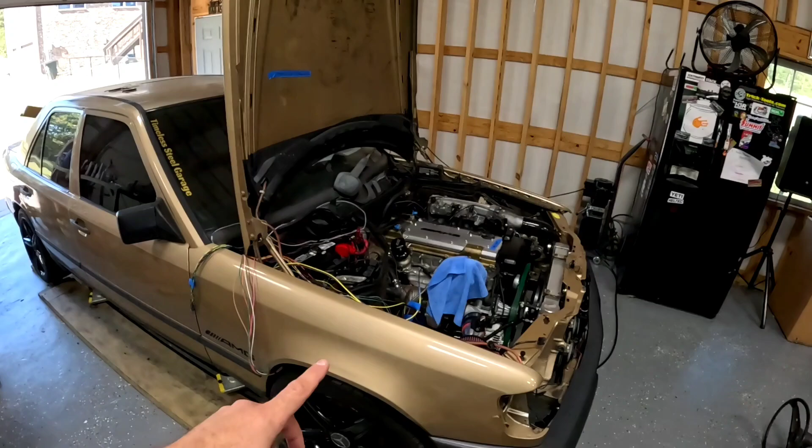Back on the Merc here, and I know you guys last week were like, why is he working on a Camaro? Well, I have to wait on parts too, so since you've been gone, I have done a few things. We got a start switch here now. Momentary start switch. Be starting the car with that.

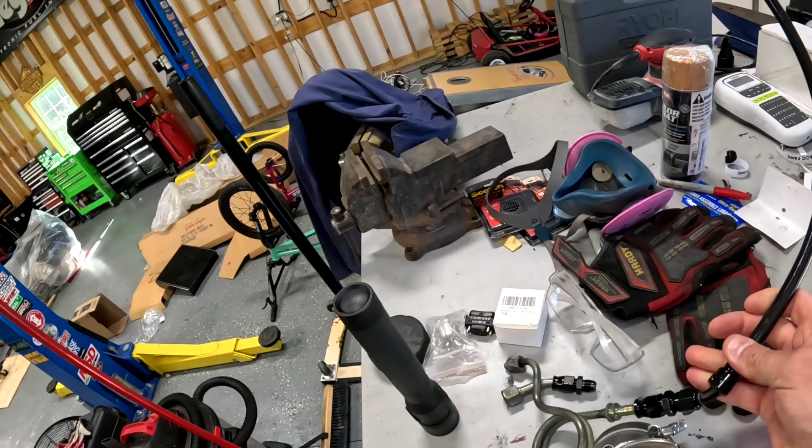I've got a couple of fittings here, and I actually have a line for the power steering. So today the power steering tank is supposed to get here, so we need to get these two lines hooked up, and hopefully when the power steering tank gets here I can mount it and we can measure for the other lines that we need, and the power steering system will be done.

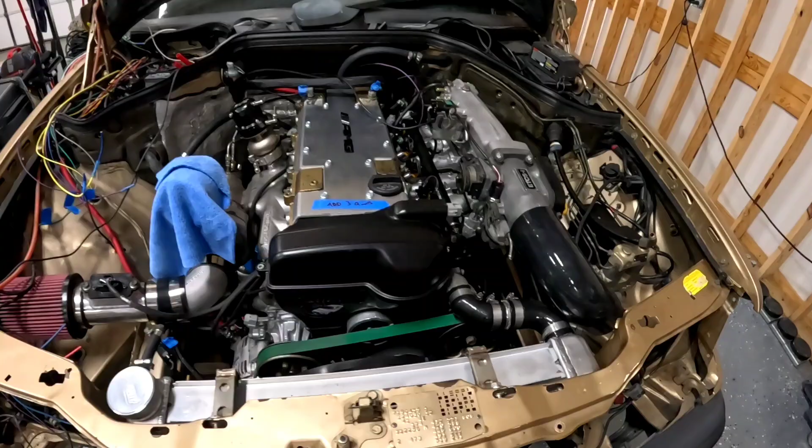The other thing that came in for power steering is I got this little adjustable fitting right here that can be turned and converts to AN10, so that part is done. The only other fitting I need for the pump itself is an M16 1.5 AN6.

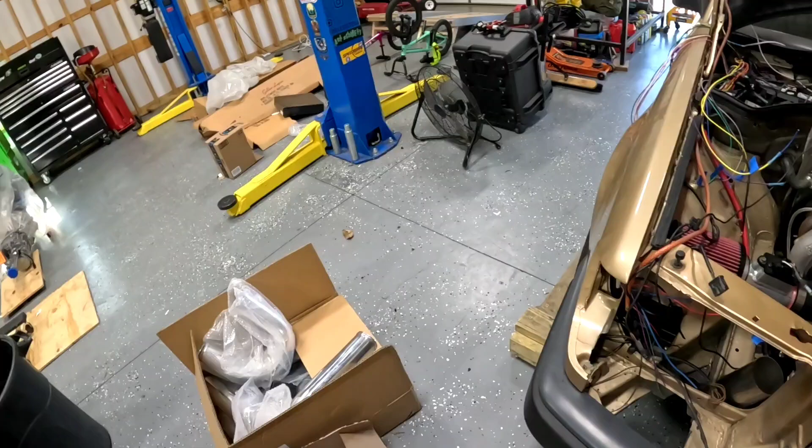And then we got some intercooler stuff showing up, intercooler pipes. I bought one of these cheap Amazon kits because I like to figure out intercooler systems with these, and then once I figure out what I'm gonna do, I can upgrade the pipes and the couplers.

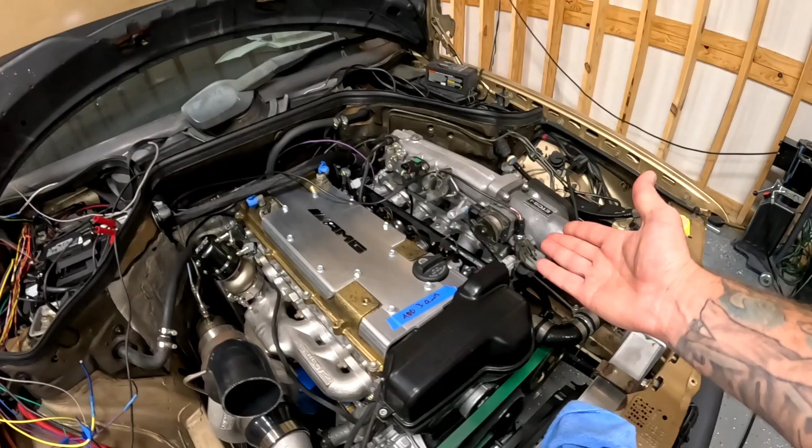Got a bunch of vacuum stuff in for the vacuum system. I just went ahead and got a whole bunch of T's, different sizes, silicone caps, because the stock GT intake manifold has got ports all over it that I'm not using. So yeah, I want to start this thing soon. So power steering's got to get done. Intercooler system's got to get done.

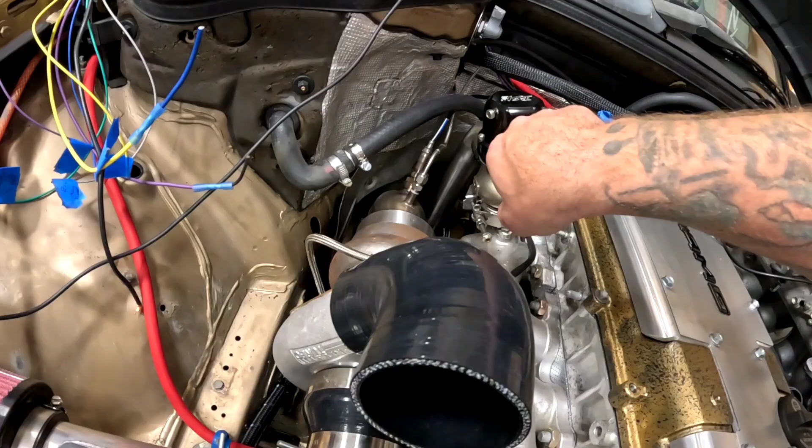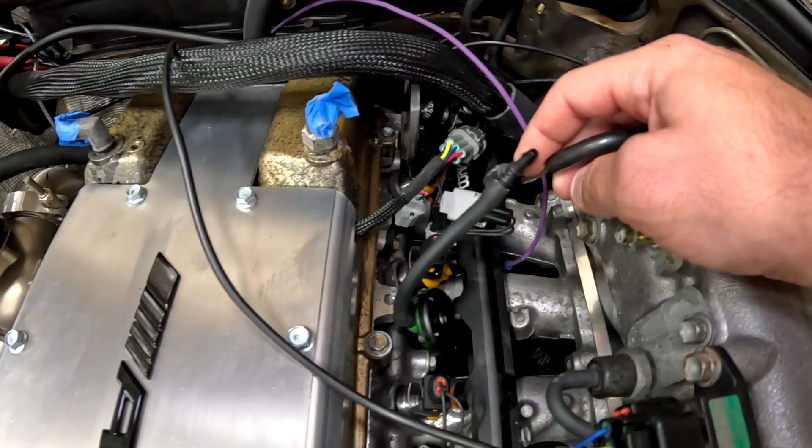So we can start hooking up vacuum lines. We've got to reference the Radium Engineering fuel regulator, and we've got to reference the Radium dampener, fuel dampener. Right now I have them both going to a Y. I can just plug both into probably this port right here, and those are good to go. Other than that, the only other vacuum in the system is the wastegate and then the blow-off valve, which I haven't installed yet. So we'll also have to weld the fitting onto the intercooler pipe for this guy, which I thought I ordered a fitting for, maybe did not.

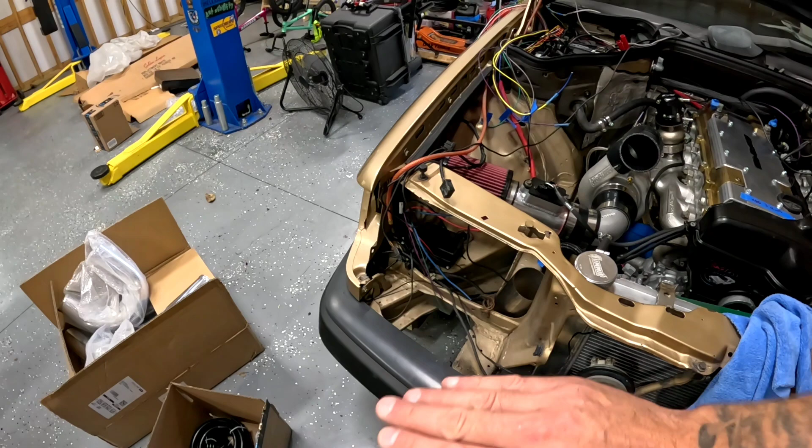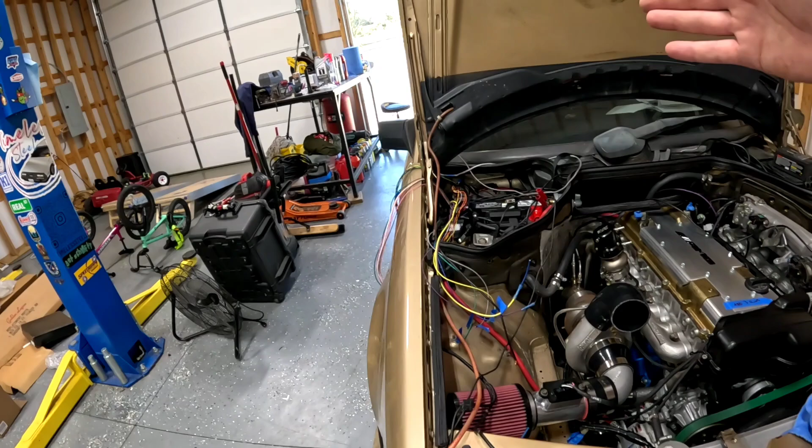And then I've decided I'm going to get rid of this fan controller because I don't really need it. I already have the ECU and the wiring already set for the Toyota ECU to kick the fans on, and I already wired in a manual bypass, so I'm just going to have the Toyota ECU control the fans. Why not? Gets rid of that, gives me some more room in the engine compartment. And then I'll probably use it on the Camaro. So that'll come out and just go on the part shelf. But yeah, let's get to work and start doing something.

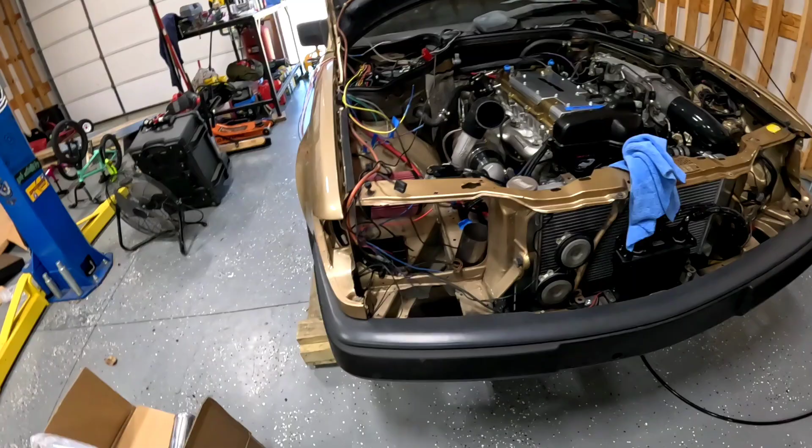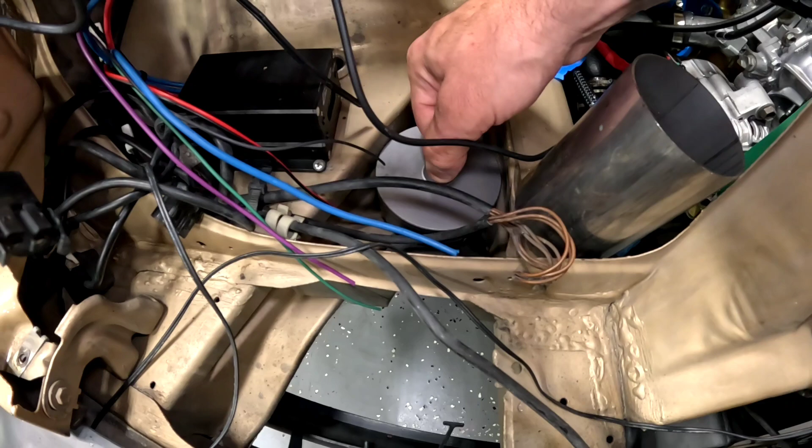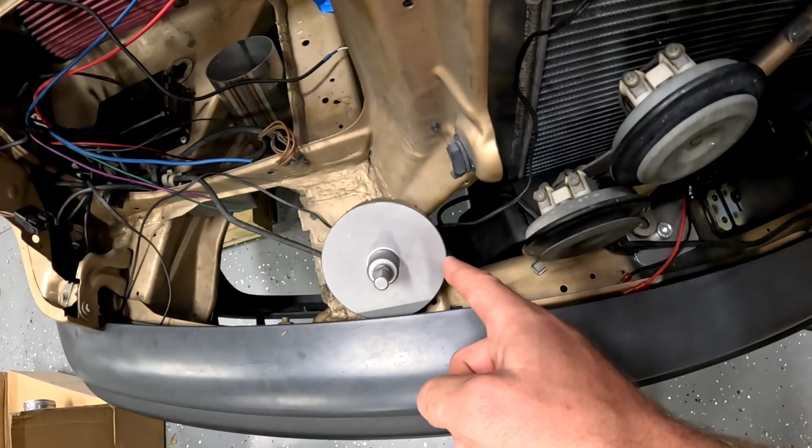Oh, I also got this 3.5-inch carbide bit here because I think I'm going to cut a little hole right there, and that'll give me plenty of room for these pipes to come up like this behind the headlights. So we'll 90 out of the intercooler and then come up through the headlight floor. Anyways, that's enough talking. Let's get to working, eh?

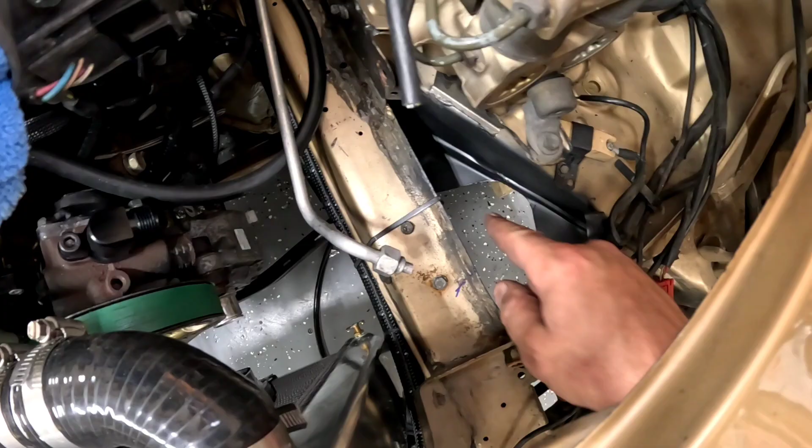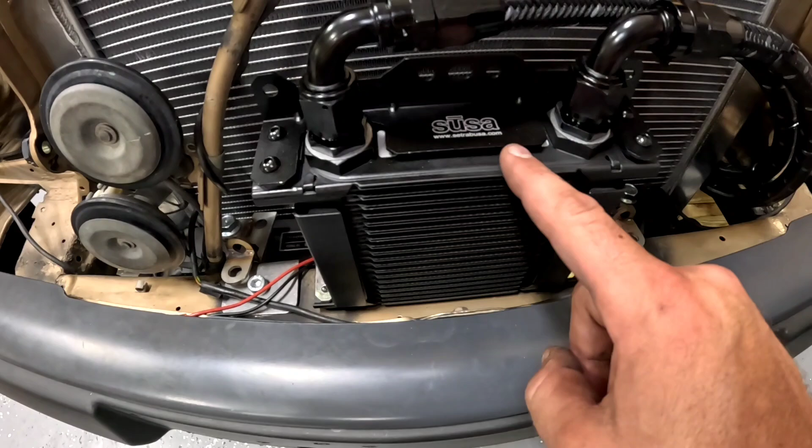All right, the vacuum system for now is done. I will clean things up later, but we got caps on all the ports here. The fuel regulator's hooked up, the dampener's hooked up, wastegate's hooked up for now. I got rough cuts made for intercooler pipes here and here, and that's it for now. Oh, I also, while I was thinking about it, took this line off the oil cooler and I pre-filled this with oil. It didn't even take half a quart.

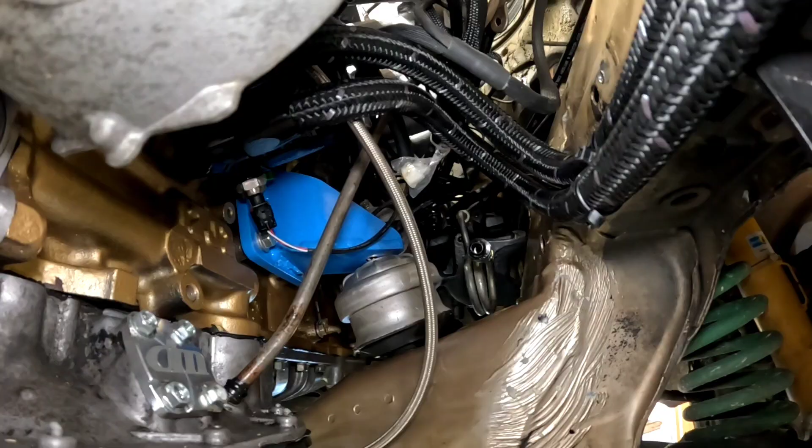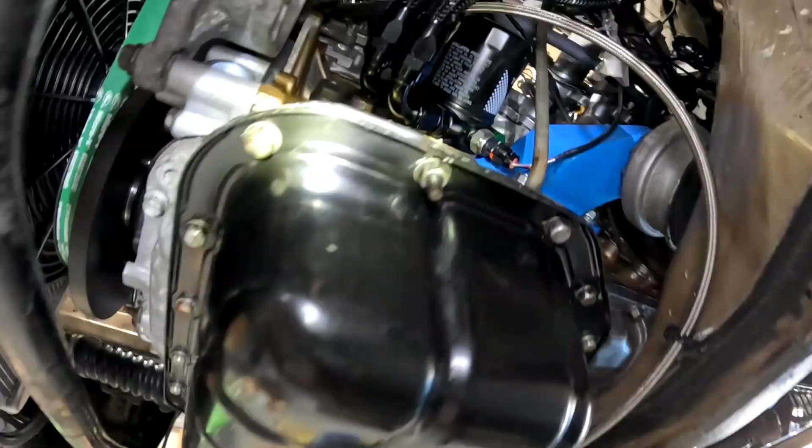Okay, we got our first power steering attachments on right there. Okay, so now you can see them up in there. There's the pressure there sticking out on the right, and then the return back there. So we've got the M16 1.5 outlet right there, and then we've got the feed fitting on top of that.

It's a new day with a fresh coffee.

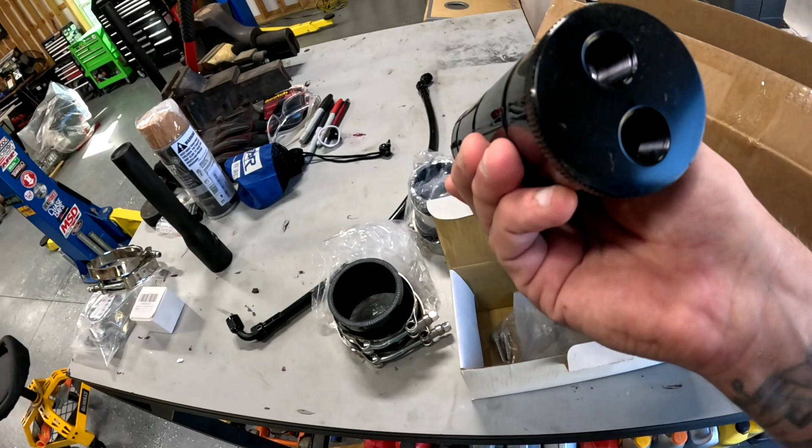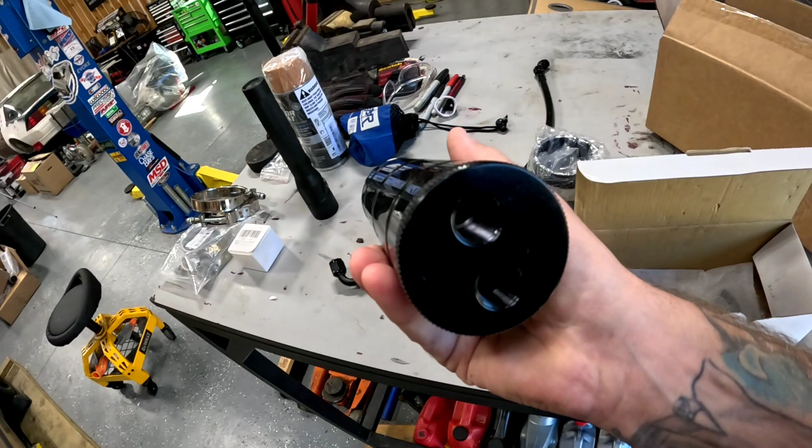Let's get to work. I ordered a power steering reservoir from Summit, part number 340202B. And it's this little billet power steering reservoir. It's not baffled, but the top and the bottoms come apart, and there's a fitting on the inside that's a restrictor for the return to slow the fluid down. It's a really nice piece, actually. Pretty cheap too. I think it was like 80 bucks.

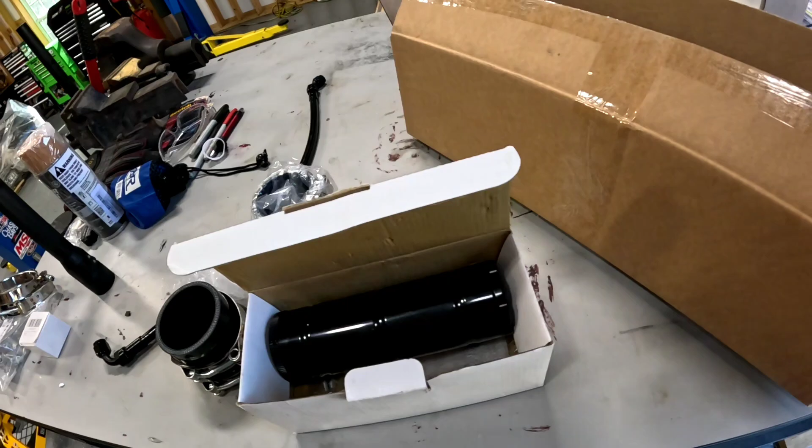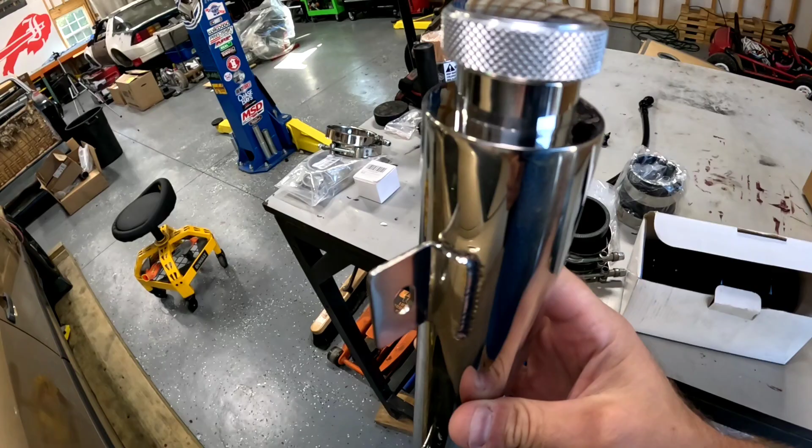Pretty happy with it. The only thing I would say is it'd be nice if they had an internal baffle, but for what we need it for, it'll work just fine. And then I got this piece from DeWitt's radiator here. Man, this is for the coolant overflow, and super impressed with the quality of the, I mean, look at the welds on this thing. And they make these in all kinds of different sizes, and it was fairly cheap. It was like 60 bucks, came with mounting brackets. Definitely would order that again.

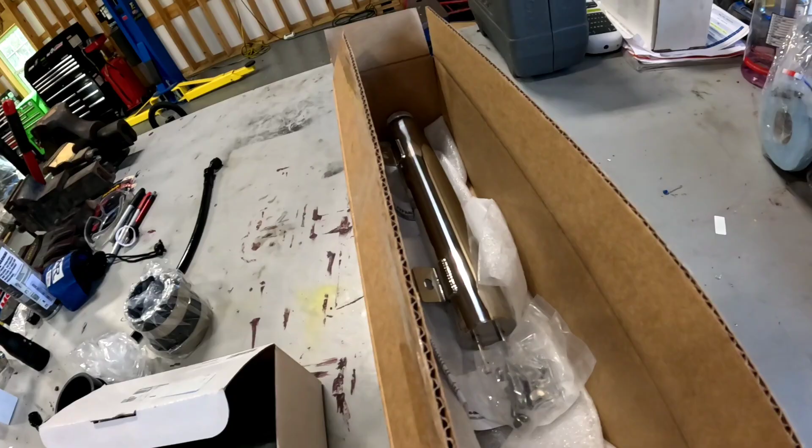Part number 32022213. This is the 2-inch by 13-inch 20-ounce version, stainless steel expansion tank. But today's objective is, first I got to get the tunes going, and then after I get the tunes going, I'm going to get that power steering reservoir mounted, tighten up the lines on the pump, and measure for lines. Because the reality is the only reason I haven't tried to fire this motor is this power steering system.

So let's get the reservoir mounted. Let's get the lines ordered, and while I'm waiting on those, I can get intercooler pipes connected to this throttle body. And hopefully, in magical YouTube land, I'll be starting this thing in like a week, but for you guys, sooner than that.

All right, I got the power steering mount here, 1/4 inch by 20 riv nuts. I had to flatten out the sheet metal because the Merc kind of curves, and that's the spot that I wanted. So a little metalsmith hammer and some welding pliers, and force that sheet metal to do what I wanted it to do. That's where the power steering reservoir is going to go.

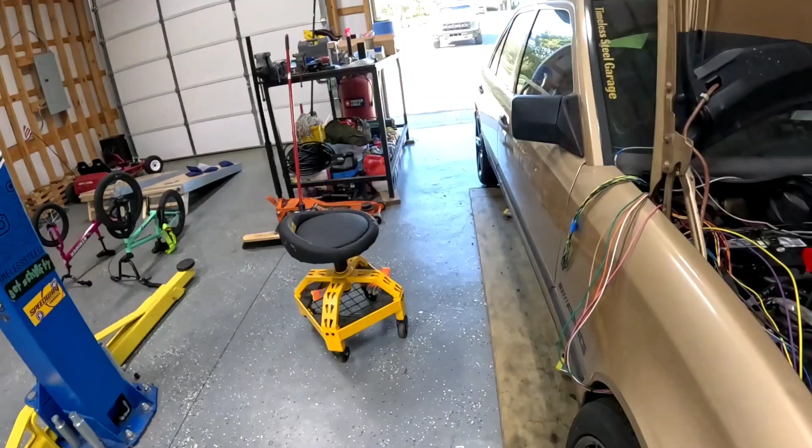And if I come over here to the reservoir, it comes in pieces from Summit. There's an O-ring on the bottom, so I got some petrolatum on that, aka Vaseline. And it's really important you install this restrictor valve on the return side. And I'm going to put a little R with some yellow nail polish on that so that I remember that it's the return side.

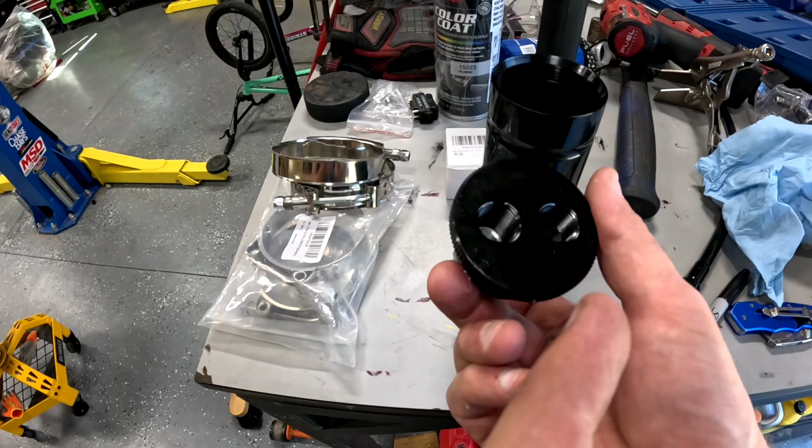The reservoir doesn't come with fittings, which is kind of a bummer, but I'll order my own fittings. So I'm going to install this tank on there, put the cap on it, and then there's 2 little set screws that hold the reservoir in.

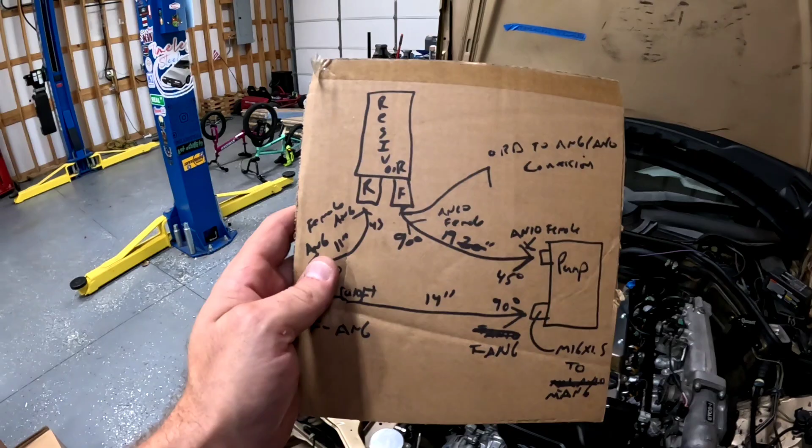Okay, I've measured and I've got my power steering system figured out. So please forgive the crudity of this model. It's not to scale, obviously. But here's what we're going to do. We got our reservoir here. We got our pump here, and we've got our Mercedes gearbox right here. So mechanical gear side, hydraulic pump side, reservoir side.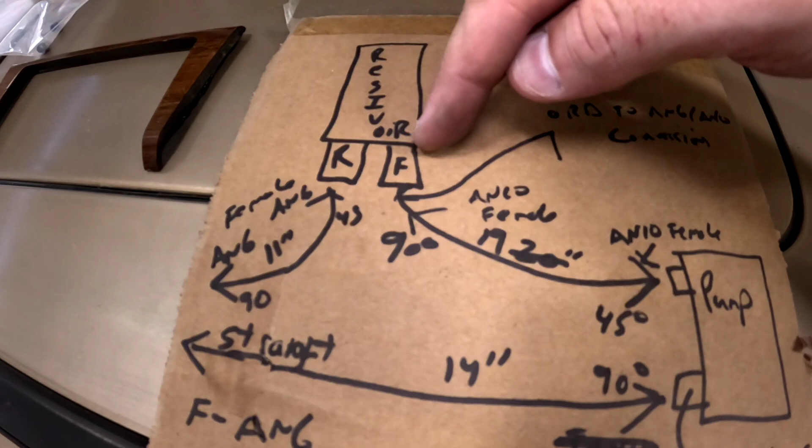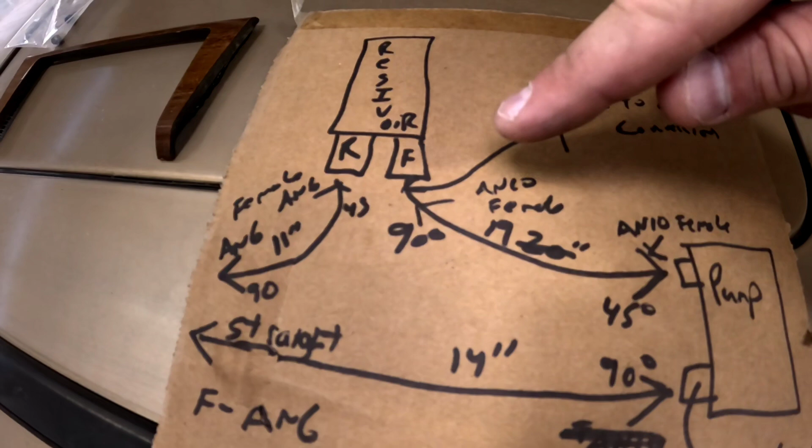The reservoir, unfortunately, doesn't come with AN10 fittings. It looks like it's ORB to AN6 size, and I wanted this to be an AN10 line. So I already have an AN10 fitting here, so I'm going to have to convert from whatever the reservoir fitting threads are to probably AN10, or I'll have to put an AN6 there and put an adapter on for AN10.

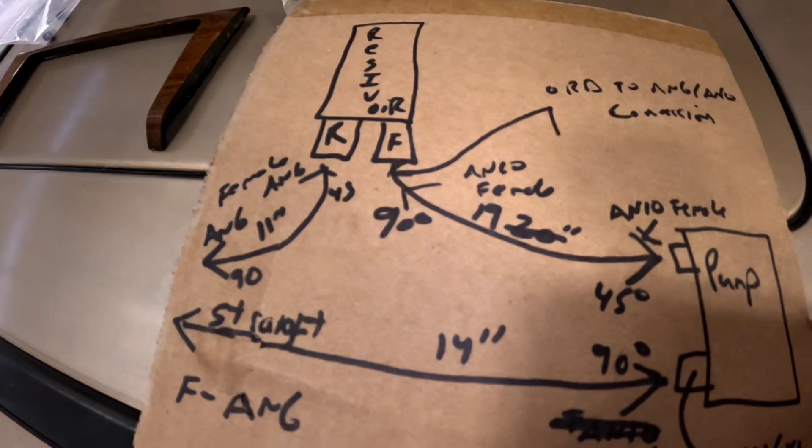This is going to be a 19-inch line. I'll have a 90 out of this side and a 45 into the pump. Then we're going to come out of the pump on the pressure side.

We're going to have a 90-degree fitting here, AN6 female, 14 inches to a straight AN6 female into the mechanical gearbox. And then out of the gearbox, we're going to have a 90 AN6 female up to a 45 AN6 female into the back end of the reservoir. So that's the whole system. I just got to order a couple of fittings.

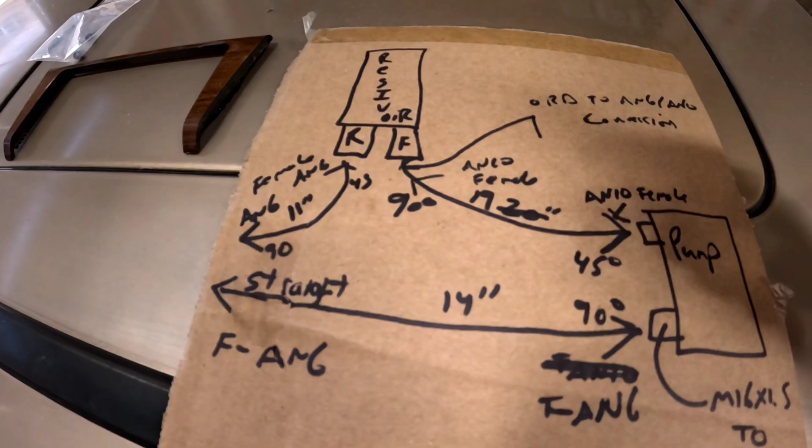This thing here on the 2JZ pump uses an M16 by 1.5 fitting, so I'll have to get a conversion fitting there, M16 1.5 to a male AN6. I've already converted the top side of the pump to an AN10. So I showed you guys before the factory IS300. Normally the reservoir sits right on top of the pump, so I've got a conversion fitting here that converts the reservoir input here to an AN10 out.

So the power steering system is in theory designed. I just got to make my lines, order some fittings, or order the lines, whatever. And power steering system is pretty much done. So that's all I can do for now with that. So I'm going to start on the intercooler system. I already screwed up and ruined my coupler that I had already bought for this, so I have to get a new one of those. I've got a coupler coming out of the turbo, I've got the couplers for the intercooler, and I've got some cheap pipes here, so let's get to it.

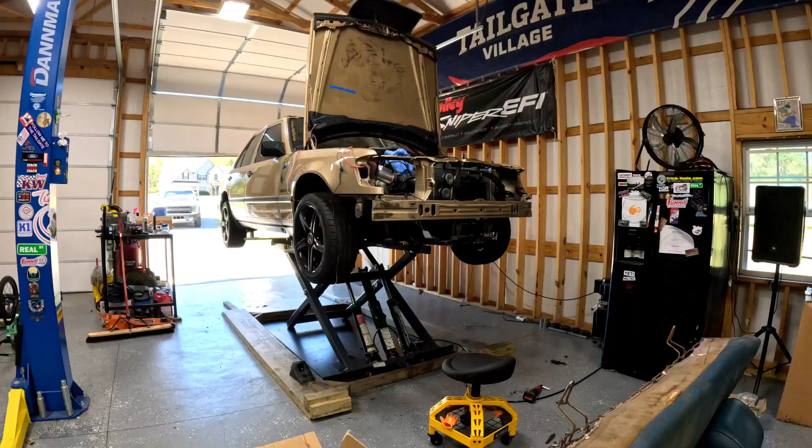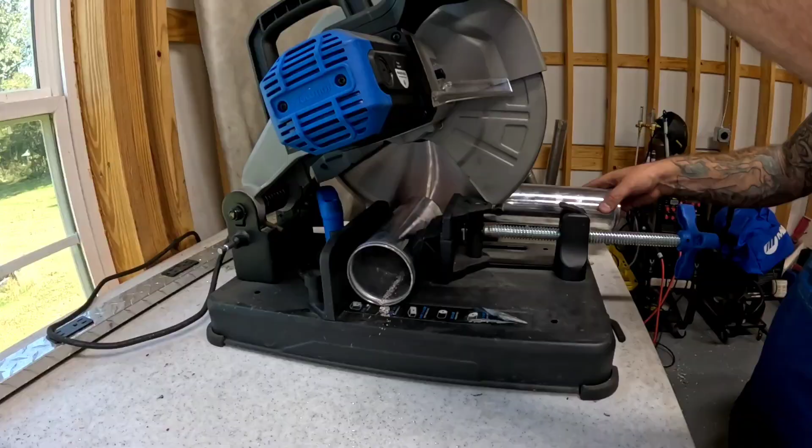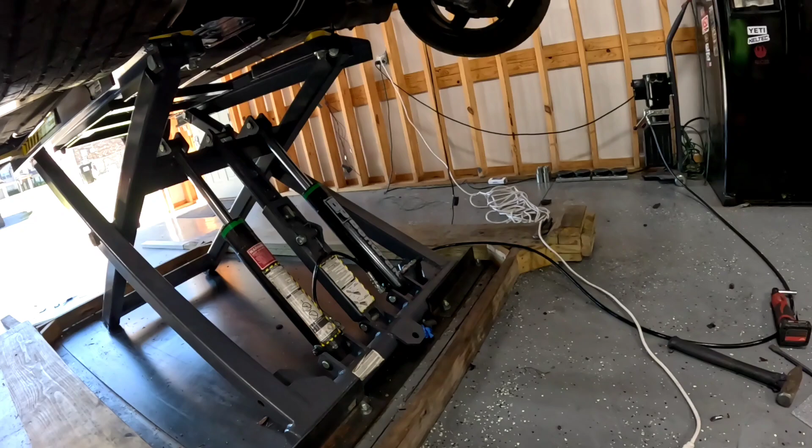All right, bring it in. If this doesn't get you excited, I don't know what does. Got the whole front end off. We're doing the intercooler pipes. We got carnage everywhere. If you're a Mercedes fan and you're a purist, then this isn't the channel for you. But we did some surgery here. So rough clearance here for an intercooler pipe. There's just no other way to fit these pipes in. And those that have swapped Mercedes know what I'm talking about. But had to do some surgery here.

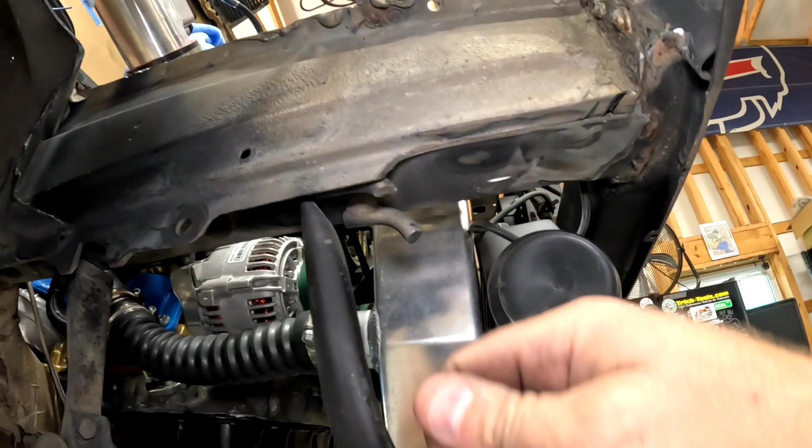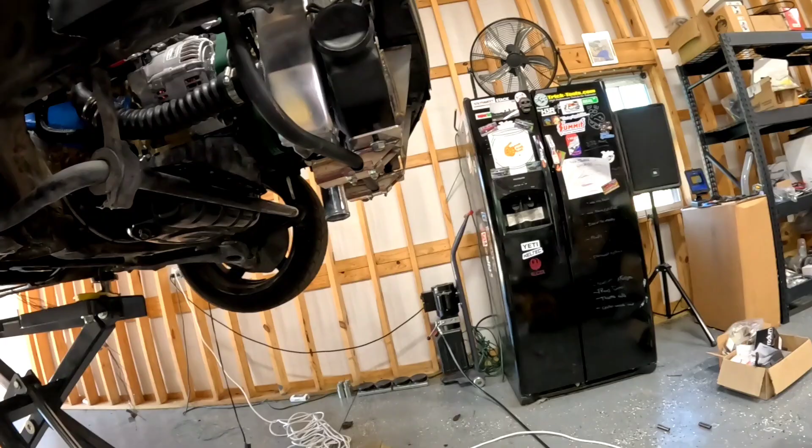We had to get rid of the old radiator supports that came down, and I had to cut into the seam weld here, and I'll come back through with the MIG and I'll weld that seam back up, clean this up right here, and then I'll put some seam sealer over it. But this will give us room here to get these 90s when I trim them up underneath that frame rail, and then we'll go up through the floor. The other side was a little easier. Just had to get rid of the pinch weld here. Same thing, I'll come back through and I'll weld this up, but that'll let me 90 into this 45.

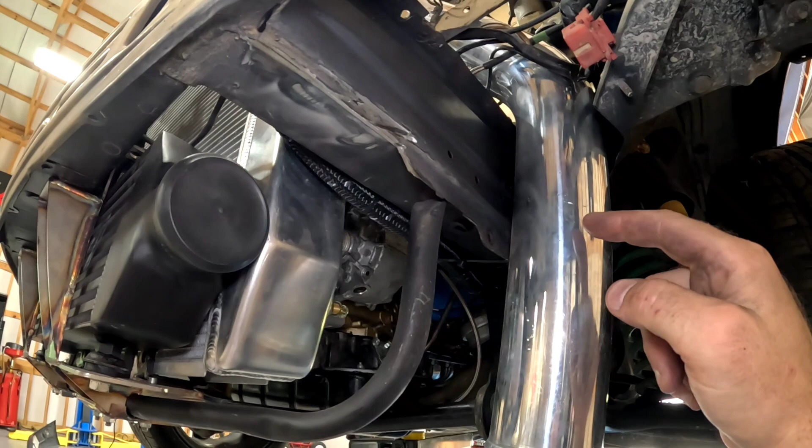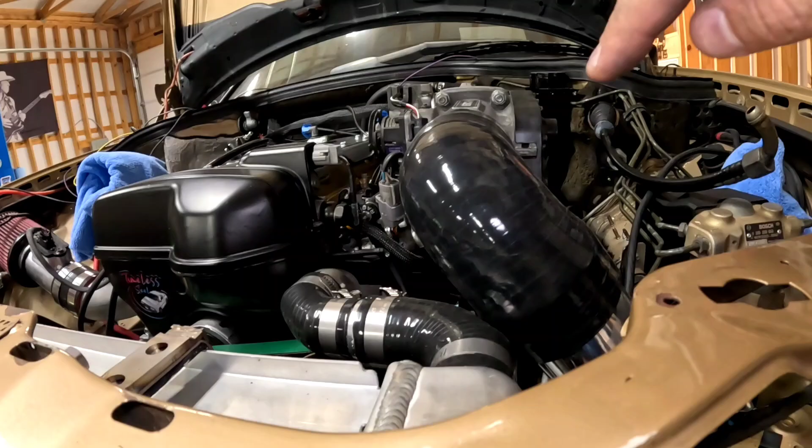This is going to be real easy. This is going to be a 90 and a 90-degree joint. 45 up through behind the headlight underneath the ABS, and then a 90 into the throttle body, and I'll end up probably welding my blow-off valve, recirc valve, right here behind the radiator. Maybe even tuck it. Yeah, I'll probably go this way on the back side of this pipe, and then I'll be able to feed back into the MAF right there.

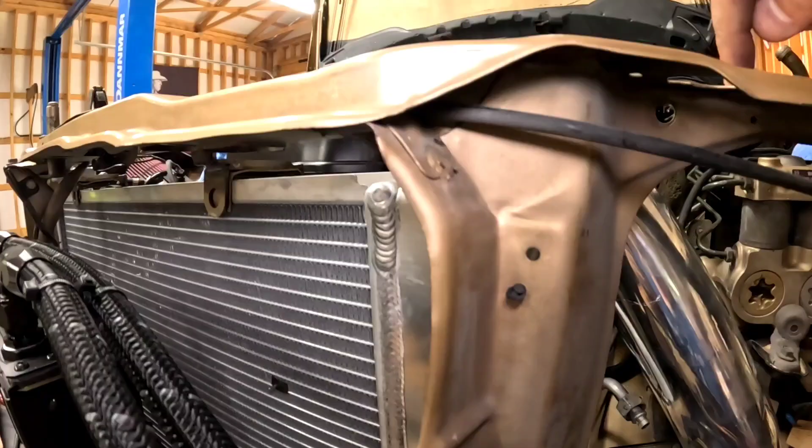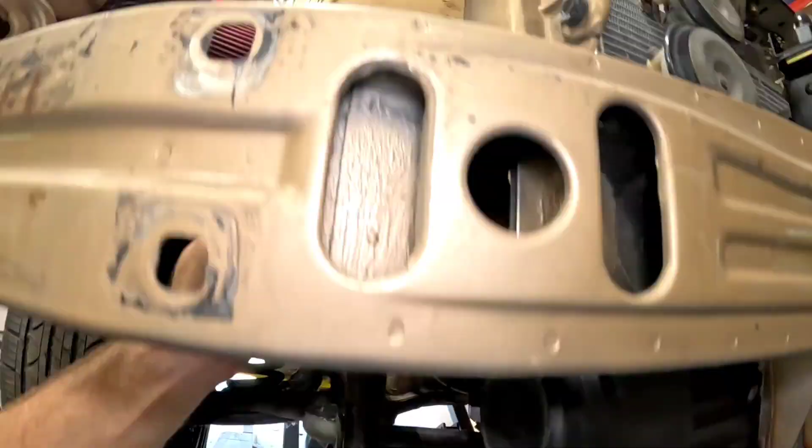So this side's going to be pretty easy too. I think we're going to have a 90, come out with a 90, up with another 45. That'll get it pretty much aligned with the turbo. And then I'll have to mess with this. I'll probably have a piece of straight pipe that comes out and then another 90 that joins that. So not too many pipes, and once I get the whole system designed, then I can come back through and make it nicer.

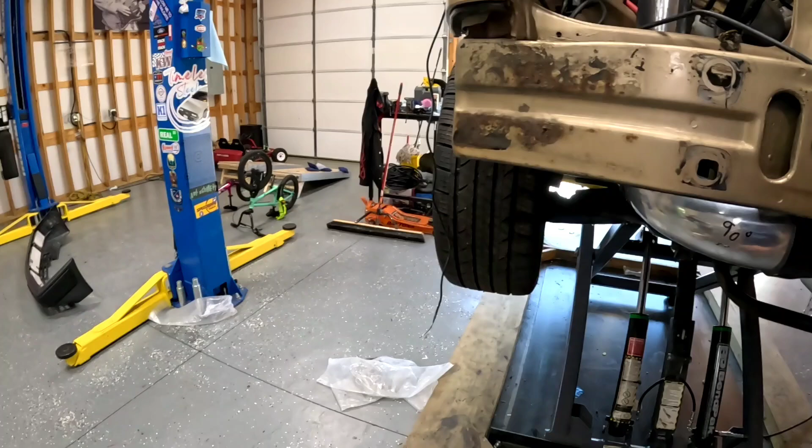Well, things are getting exciting around here. Check this out. We got our intercooler pipe system roughly designed. So first of all, this is a cheap garbage kit from a company that rhymes with Pokemon. I don't recommend this. What I like to do is get this cheap kit that costs like $100, because you can use it to cut it up, design your system, and then when you're done designing it, I like to order from Ace Race Parts or Vibrant.

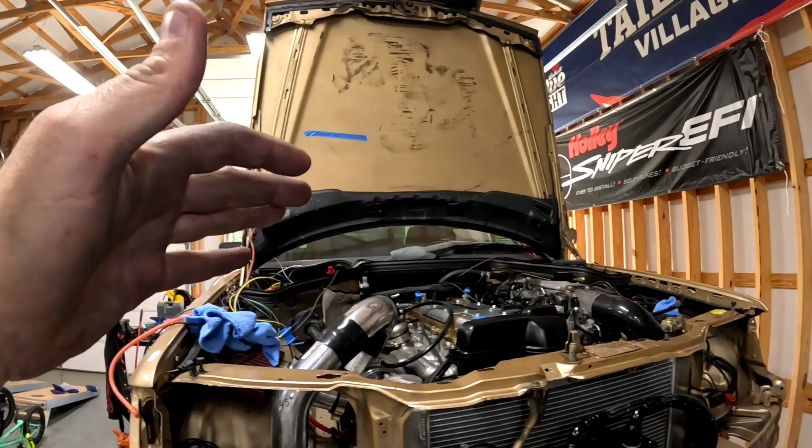But this tube is not even, first of all, the gauge of aluminum is so thin, it's really easy to ruin this pipe. And I don't know what they use to make it, but it's not actually round. And it comes full of like oil and garbage in it. I don't recommend it, but for the purposes of what I'm using it for, it's perfect, because now you can see I've kind of designed my system. I wrote 90, 45, 90, 90, 45, and I have an idea of what couplers I need.

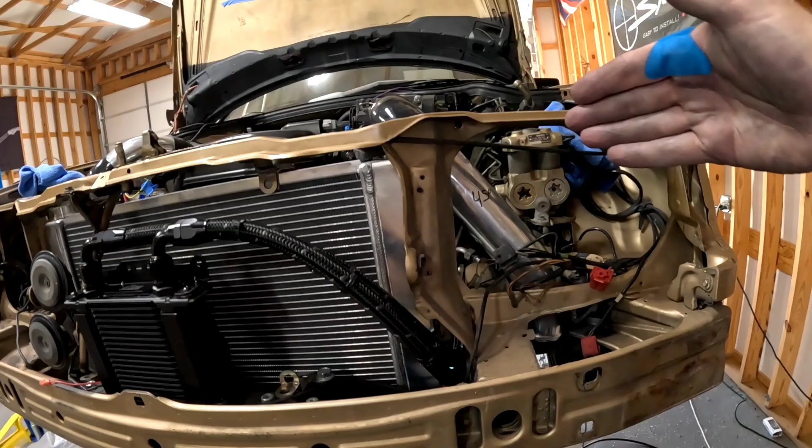So I got my intercooler coupler. Oh, that's the other thing I was gonna say. They'll say 4-ply coupler, right? And then you get a good quality like Vibrant coupler that's 4-ply compared to one of these. It's like night and day. So couplers are garbage. Like, I want this car to be reliable.

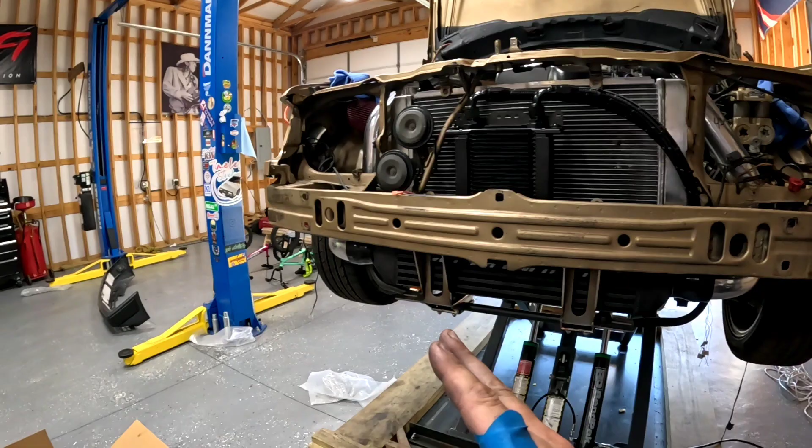So the intercooler couplers are good. The turbo coupler is good. And this is garbage. So I need a good 90, another good 90, and another good 90, and a good straight. So I need 1, 2, 3 90-degree couplers and 1 straight. So now I can go to Ace Race Parts or wherever you get your tubing from and order the exact pieces I need that I know are good quality. But let's check this out.

So underneath the car, you can see 90 comes out, goes over, and then hits that 45 up through the inner fender. And over here, 90 comes out, hits that 45, goes up to the throttle body. You can see what it looks like from the top. Comes out, hits here. Let me grab it so that you guys can see what I'm talking about. So we got this Tial wastegate here. I think this is a 55. I don't even remember. I'd have to look it up.

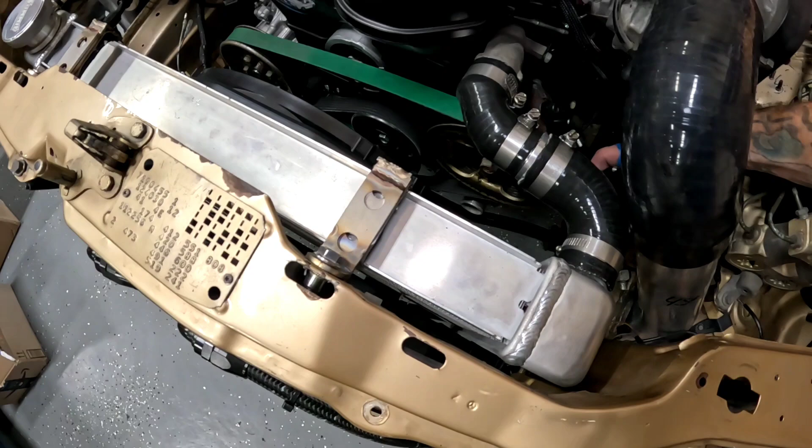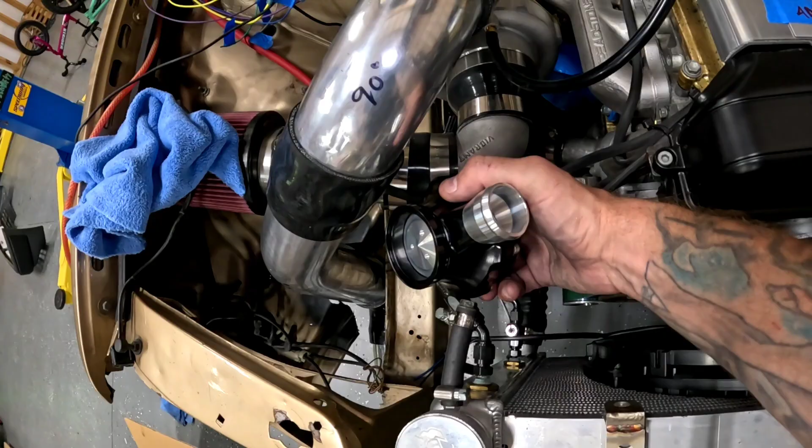I'm gonna end up welding this bad boy probably like right here. I'll have to mess with it. But on the back side of this pipe, somewhere out of the way, maybe even like that. I kind of like that right there. And then it'll recirc back over here behind the MAF. But the beauty is I order one coupler and I can put all these cheap couplers together, and the motor is going to be seeing the air that's actually going into the throttle body here.

So I can test fire it the way that it is. And really all I need is my power steering lines, and this thing's ready to test fire. So before I spend any more money on anything, I'm gonna hook those power steering lines up, and I wanna hear this thing run. Once I hear it run, then I'll take these garbage intercooler pipes off and make a nice system, start hiding all this wiring, and start making this thing pretty again, making this motor great again, if you know what I'm saying. So, I don't know, it's pretty exciting. I mean, would you just look at it? It's awesome. I love it.

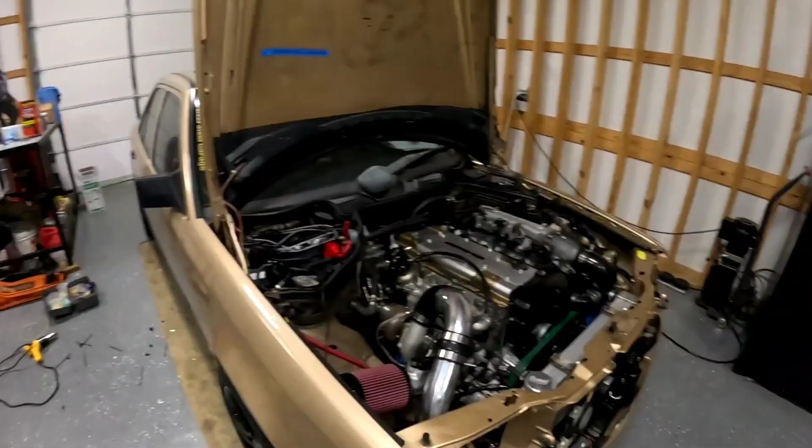Okay, we've been pretty busy. Let me get you caught up. So I've got the intercooler pipe system all clamped together. Now this is a garbage setup. I need to hear the engine run. The MAF sensor air, everything's gonna get to the intake. I already know that this driver's side pipe's not gonna work. I'm gonna have to do some more clearancing in here, which means I'm probably gonna get rid of this ABS that doesn't work, but that's a future problem.

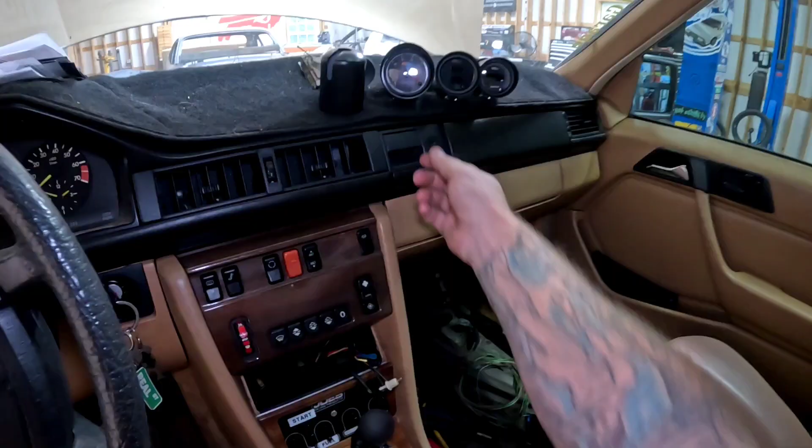Cleaned up a lot of wiring. The gauges wiring still needs to be cleaned up on this side of the house. But on the inside of the car, cleaned up all the wiring in here. Now, there's still wire sheathing that's going to be put on all this, and I have a whole bunch of excess gauge wiring stuffed in there until I get the gauges routed permanently on the outside of the car, and then I'm going to take the excess out through here, trim it, and tuck that in. But I labeled everything here in case I die. The next guy will know what's going on, which next guy will be my brother, probably.

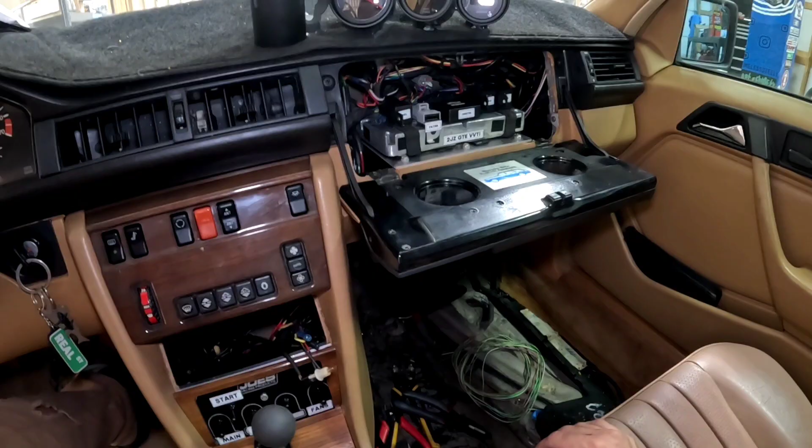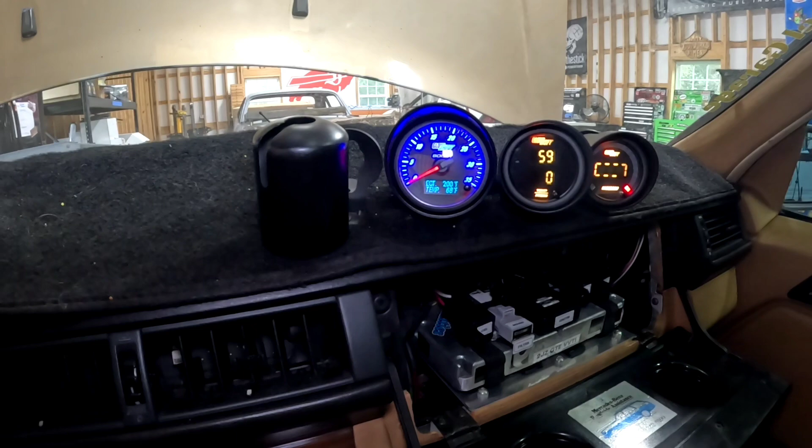But I got the starter panel wired up in here. Let's see, I can show you the gauges, I suppose. Key on, everything fires up. Now, I had a tach gauge, but it was bad right out of the box, so I've ordered another one. And I've got these turned to Mercedes orange, so they'll match the interior lights. And I even have the dimmers wired up, so when I turn the headlights on in 3, 2, 1, they dim.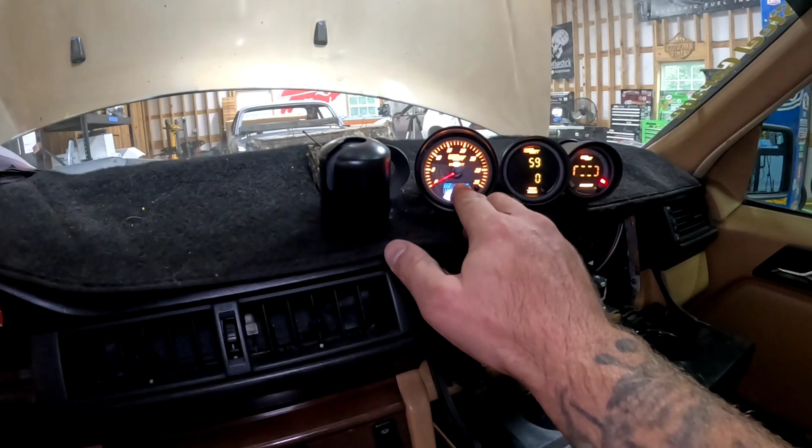So we've got boost, which isn't hooked up yet, exhaust gas temperature, engine temperature, that is transmission oil temperature, engine oil pressure on the bottom. We got our wideband gauge on the right. And then we're gonna have a tach with a shift light right there.

And if you're wondering, why did I put all old gauges in? Well, I wanna keep this car like a late 90s, early 2000s car feel, like what I would have built in my 20s or in high school. I think it's cool. And that's why I kept the old school ECU. I kept the 90s motor. We've got the gauges in here. I'm even gonna put an Alpine deck back in this thing. So anyways, that's that.

Now here's the deal. I am at the point where I don't really want to put any more time or money into this car until I hear the damn thing run. And I'm sure you guys just want to hear it run too. So I'm sure you guys have all been paying attention. We've had a couple hurricanes. I've had some family and friends affected by it, and it's been a rough time down there. And because of that, there's some performance companies down there that I ordered some parts from that haven't showed up. So my power steering lines aren't installed and this and that.

But listen, people are missing their houses. I could care less about my parts that I ordered. They'll get here eventually, right? But I got to hear this thing run. So I don't want to put any more time into it until I hear it run. So I'm willing to sacrifice the power steering pump for a couple of seconds. Hopefully I don't burn it up, but I'm willing to do that. I don't have a blow-off valve on. We don't need that right now.

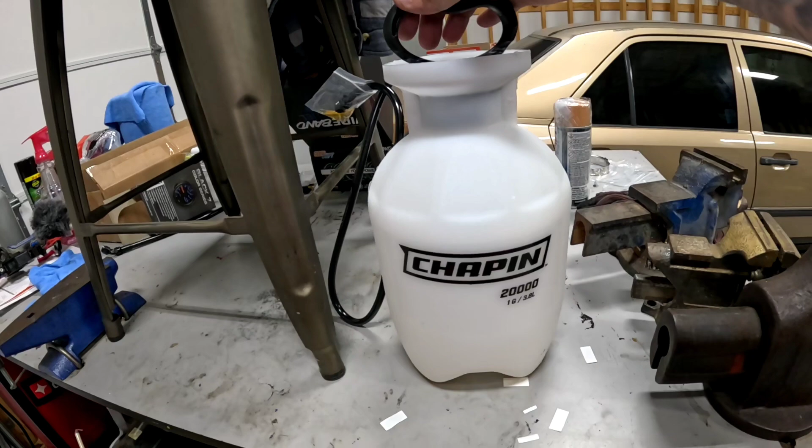And my intercooler pipe's just mocked up, but in theory, everything is final wired on the motor. Like anything that makes this motor run is final wired to the car. So we should be able to just get in here and crank the thing. Now I did buy a Chapin sprayer off Amazon, which, shout out to Batavia, New York, and all my family near there. Chapin sprayers are made in Batavia, New York. And I just took the Chapin sprayer, I cut the hose, I put a 1/4 inch barbed fitting to a 4AN connector, and I took my oil feed off the turbo and pressurized 3 quarts of oil into the motor. So we have now got 6 quarts of oil in the motor.

We've only got 4 in the transmission, but I've got to get the transmission spinning so that the pump sucks the fluid up. We don't have power steering lines, so we don't want this motor to run long. We want it to run a few seconds, hopefully build oil pressure, suck the transmission fluid up into the pump, and then we'll turn it off. Then we can put transmission fluid in the trans. We can get our power steering lines, put those on, but I just need to hear it run. It's been 2 years. Actually, I think December is two years. December 20 something is 2 years since this car has run.

So without further ado, I made you guys wait long enough. Let's see if this damn car runs. Now I got a camera running on the front of the car, I got a camera running on the back of the car, and we're gonna use my good old fashioned cell phone so that you guys can see what happens on the inside of the car. 2 years, I gotta make sure this is documented, you know what I mean? Okay, here we go. Let's get these gauges powered up. I wanna see oil pressure, but I don't want it to run long. Hell, I don't even know if it's gonna run.

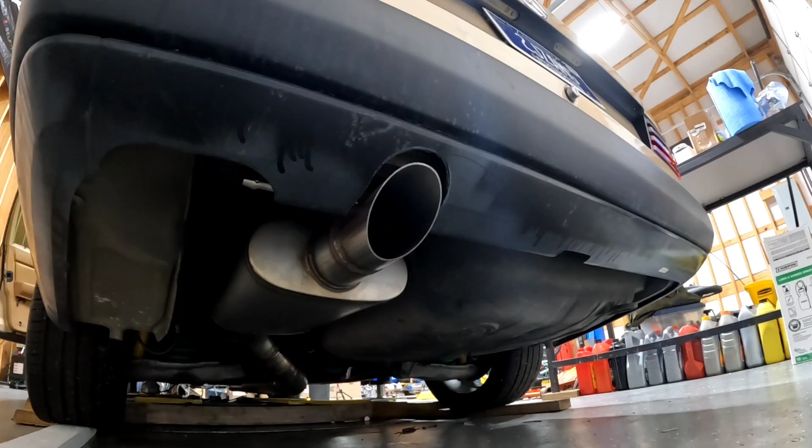Let's see here. Ooh, man, my heart is... I'm scared. I feel like I'm in a haunted house or something. Okay, been waiting for this for 2 years. Give me no whammies, no whammies. Come on, here we go, no whammies. Oh, yes! It runs! It freaking runs! Oh man! Oh man, that's a good feeling.

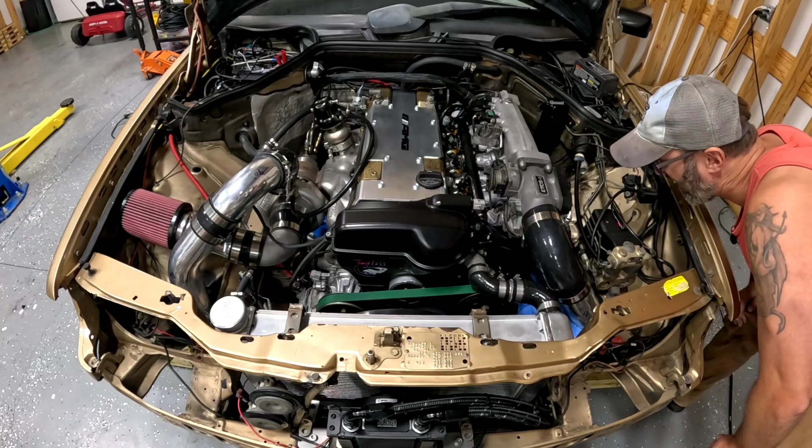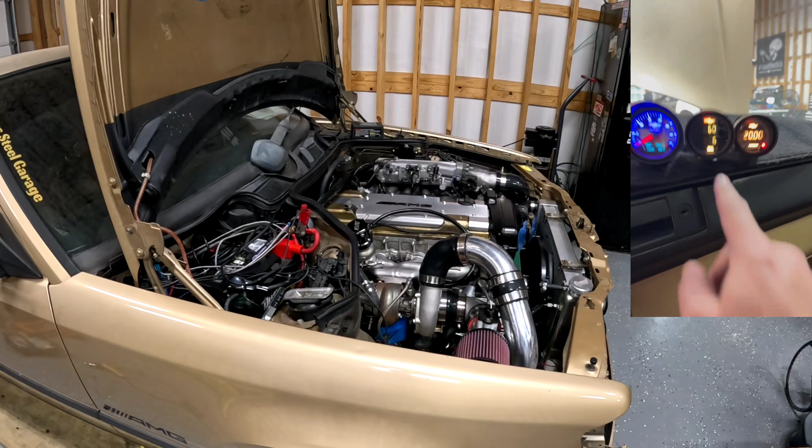We got any crazy oil shooting out anywhere? Oh man, I wish you guys could feel my heart right now. Holy cow. Whew. There's no better feeling than that. I saw oil pressure. I had oil pressure. That's good. Man. Oh, I smell oil. It's the beautiful smell of life. Let's turn her on one more time. I got to do it again. Yeah, we got residual oil pressure here. That's good news.

Oh my God, that's a good feeling. Holy cow, man. Man, oh man. Wow, okay, well, I'm gonna crack that oil line off the turbo and I better have oil coming out of it. And now I gotta add transmission fluid and power steering lines, and she runs! She freaking runs, dude, I'm stoked.

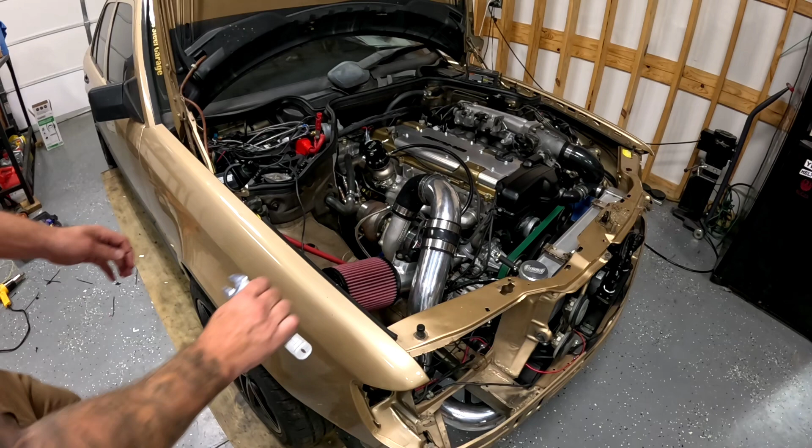Okay, I'm gonna get a crescent wrench here and I'm gonna break that turbo oil line. It showed me having pressure. I better see some oil coming out of that turbo line here. I wanna smoke this turbo. Oh man, the exhaust is warm.

That's so cool. Man, I'm telling you guys, if you've never built something from scratch like this, and I built this motor. I built this motor and everything. I'm just, man, I'm so stoked. So stoked. My heart's shaking, my arms are shaking. Whew.

Oh yeah, there's oil. Good, good, good. Last thing we want is to burn up this very expensive turbo. We got oil, so the turbo's got oil. We don't want to kill that. That's the blood of this whole motor right here. It's useless without a turbo as far as I'm concerned.

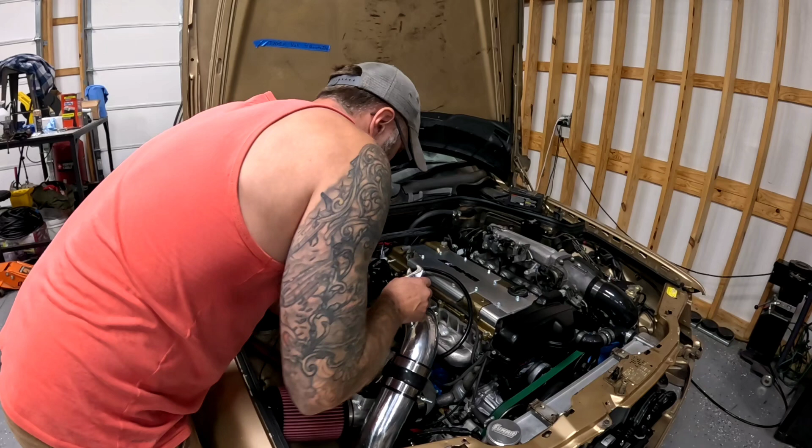Holy cow. I wish I could. I hope you guys adequately get the feeling that I have right now when you watch this video. I cannot tell you how awesome this is. Holy cow.

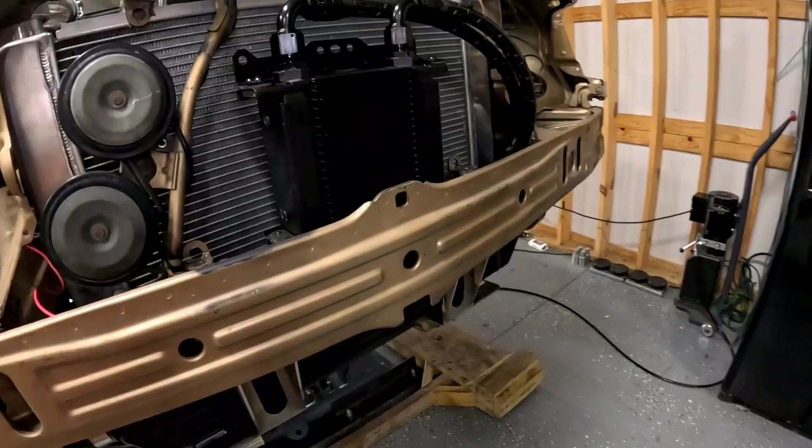Okay, I guess we should lift it up and see if we got any oil on the ground or anything crazy, huh? Before I do that, I would like to kill everything. All right, car's up in the air, and dude, there's nothing on the ground. Oh God, I'm so stoked. Oh man, I cannot wait to drive this thing. Did you hear how that thing sounds? Dude, it's so cool, man. I'm so stoked right now.

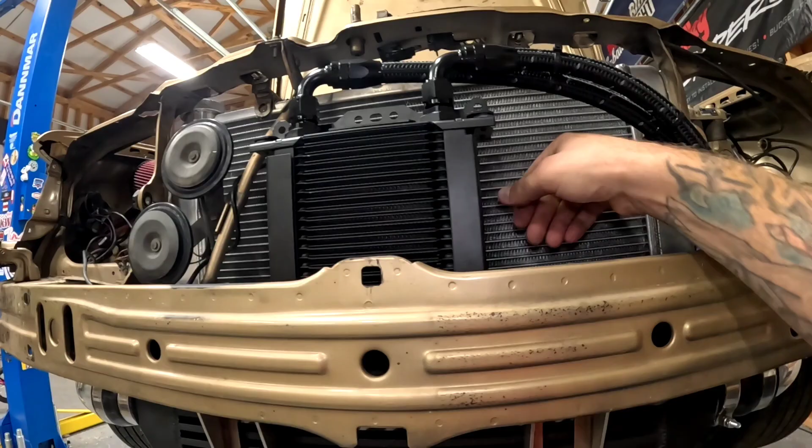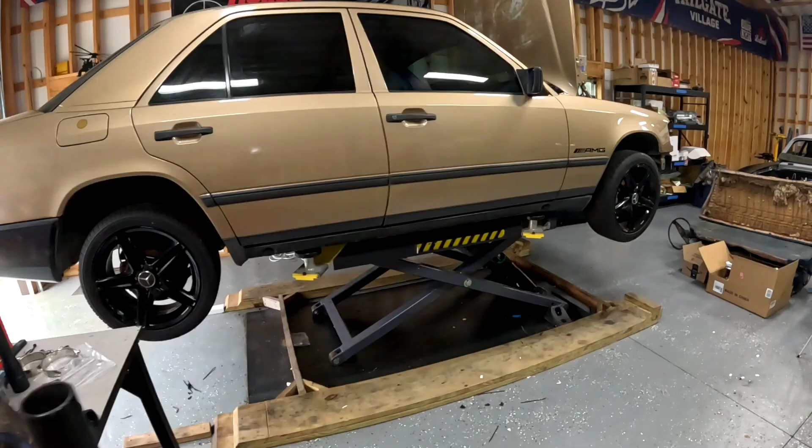This motor sounds, man, I hope you guys can hear it in the video at home. I put a really good microphone on that camera that was by the exhaust. Let me see it here. I had this really nice Rode mic here pointed right at the exhaust, so I'm hoping you guys get the true sound of this motor, because God, if you've never owned a 2J before, man, I think there's a reason these motors are so popular. It sounds like a damn Ferrari almost. I mean, hell, it's like half a Ferrari the way these heads are, but golly.

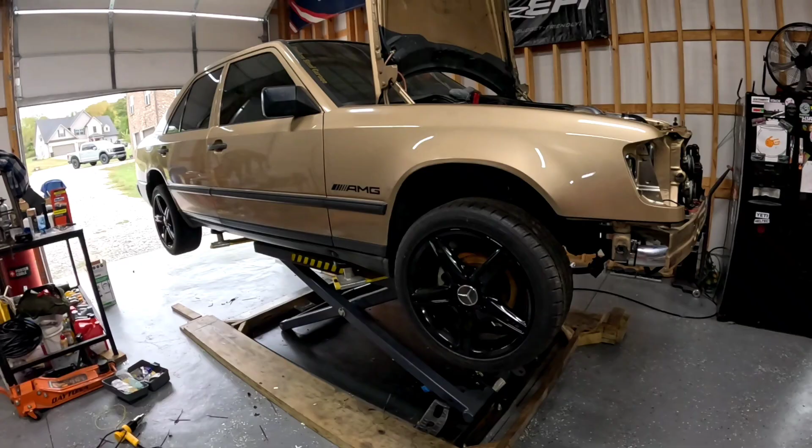Griff, love you, buddy. I hope you like the car. I hope I stayed true to what you wanted me to do with it. He said, Jimmy, it's yours. Just do something cool with it. So I think we have.

Man, that'll be it for today. After this, I think it's time that we can actually finalize the intercooler pipes and stuff and make sure the transmission works. Next episode, I think we'll start working on that transmission, make sure it actually goes in gear. And we'll get a blow-off valve welded on the intercooler pipes. We'll get rid of these junk intercooler pipes, put some good ones on there. We need a throttle cable.

And we need to clean up all this wiring for these gauges that's kind of laying around in the engine compartment. And we need to put a boost sensor in the intercooler pipes. We need to put a recirc fitting back behind the MAF or before the turbo. And then it's ready to drive.

Man, thank you guys for sticking in here for the last 2 years on this build. I think it's going to be worth it. I think this car is going to be nasty. And man, we're not far away from doing burnouts and power slides in a parking lot, and I'll bring you along for that.